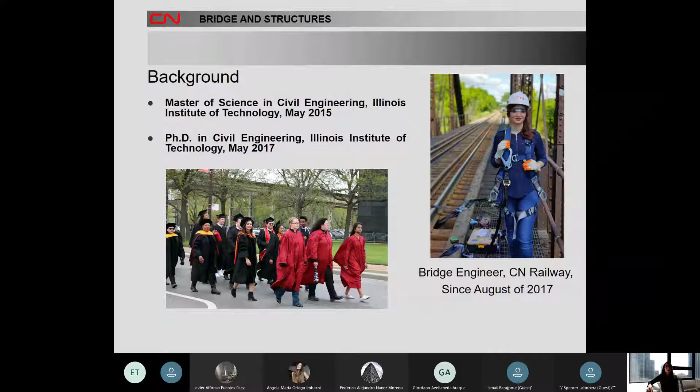CN is the Canadian National Railway Company. It has so many routes all around the US and Canada, so it's not working only in Canada—we have many routes in the US too. It has more than 20,000 miles of network spans in both Canada and Mid-America to the south. It serves Canada and the Midwestern and Southern United States. Importantly, the CN routes connect all three coasts: the Atlantic, the Pacific, and the Gulf of Mexico. As you see in this picture, these are the routes of CN, Canadian National Railway, going all the way from western Canada to the east, and from the north of the US to the south.

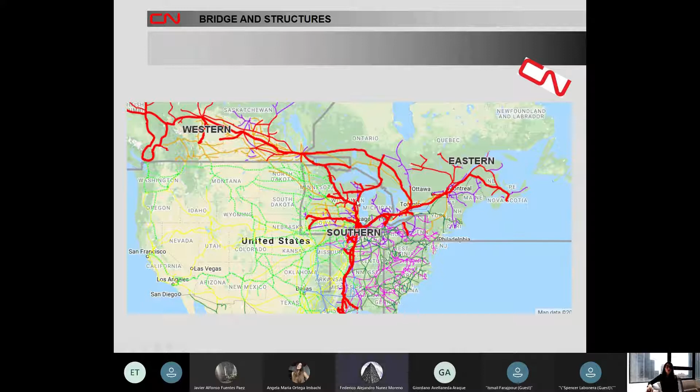CN has so many groups and organizations—it's a really large company. We are with the Bridge and Structures group, which is divided into four different groups: bridge rating, bridge quality, bridge testing, and bridge design. In bridge quality, inspectors go to the bridge to inspect it and identify corrosion or other issues, then give that information to the bridge rating group. Bridge testing does a similar thing in their own way—technicians go to the bridge, test it, and give the results to the bridge rating group. In the rating group, we analyze the bridge based on that data to see if any repair or strengthening is needed. If only strengthening is needed, the bridge rating group proposes it. But if repair of parts or replacement of spans is needed, it goes to the bridge design group, and our design engineers design those spans for us.

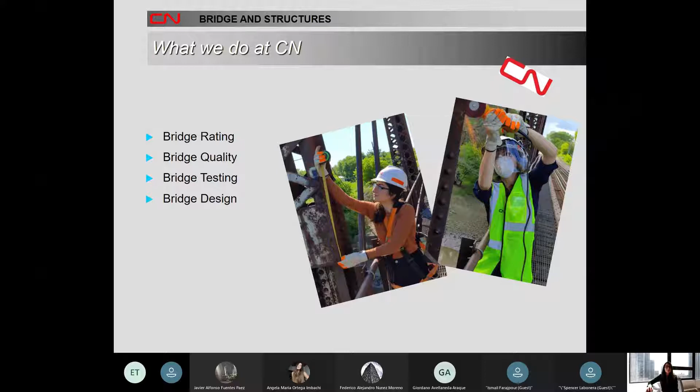The code we work with is AREMA, which stands for the American Railway Engineering and Maintenance-of-Way Association. AREMA comes in 4 volumes: Volume 1 is track, Volume 2 is structures, Volume 3 is infrastructure and passenger, and Volume 4 is system management. What we work with in the Bridge and Structures group is Volume 2, structures.

AASHTO is the code, the manual used for highway bridges. AREMA is the manual used for railway bridges. AASHTO is mandatory, however AREMA is not mandatory, and you can use it the way you want.

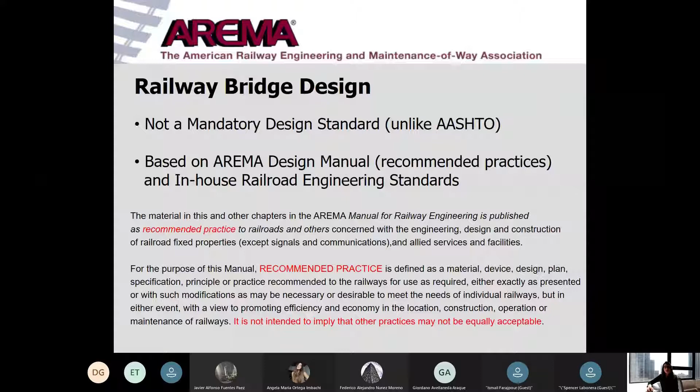So at CN railway, we use AREMA for our analysis, our design, our testing, and our inspection.

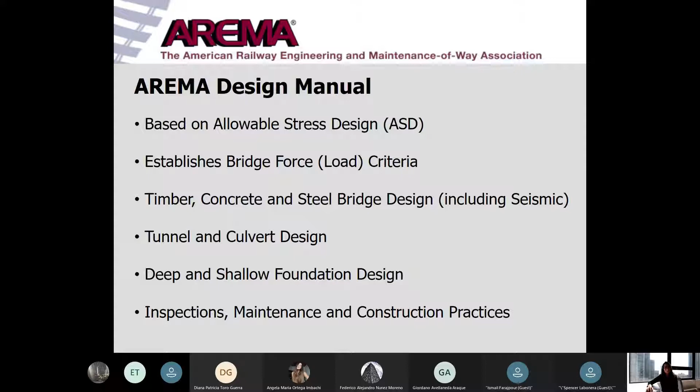There are different loads used in railway bridges: dead loads, live loads, and other loads. Dead loads are primarily the span's own weight. Also, any other static load expected to remain for the lifetime of the span is assumed as dead load.

Train or vehicular traffic are the live loads, temporary in nature and usually in motion. The standard design live load for railway bridges is the Cooper E load. Cooper E80 is what we use right now for design of our bridges, and Cooper E50 is what we use for our analysis. The way you convert E80 to E50 is simply by multiplying the load by 5/8.

There are also other loads like impact, traction and bracing, centrifugal, and wind. These are loads associated with the dynamic effect of the primary live loads or natural forces. The engineer analyzes the structure for a combination of loads and considers those which produce the maximum stresses. These loads, which may or may not be present at all times, are taken into account as they apply.

Other loads include the following. The first is the impact load. This dynamic load includes rocking and direct components that together can reach values as high as 60% of the primary live load. Short spans will be subject to higher impact loads than longer spans, due to a combination of track and wheel geometry and suspension parameters of the rolling stock. The condition of approaches will particularly affect the magnitude of the impact.

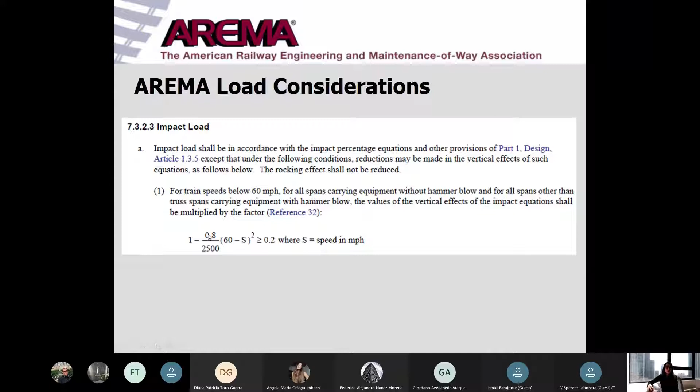This is also the code we have for centrifugal force and longitudinal force in AREMA. I explained the longitudinal, centrifugal, and all the other loads, so I'm just showing you how they are presented in the AREMA manual.

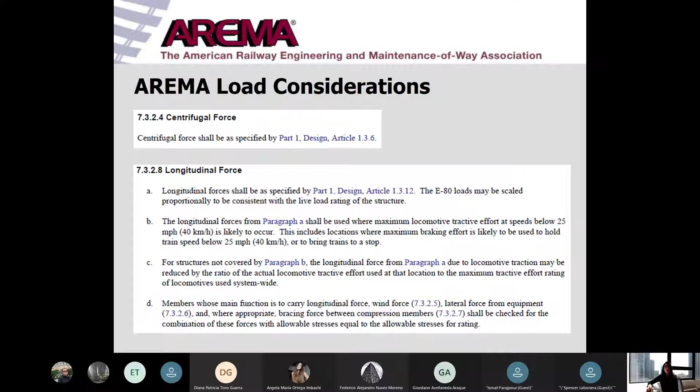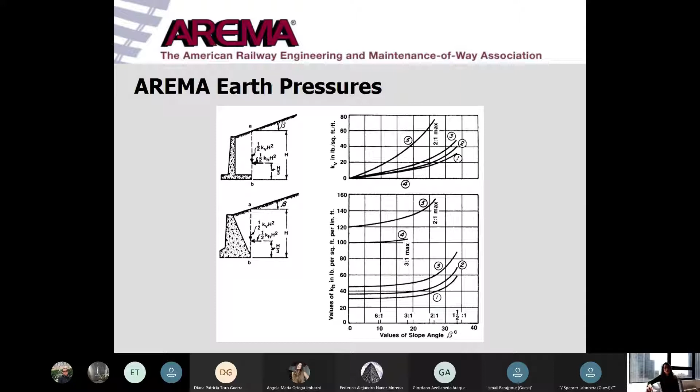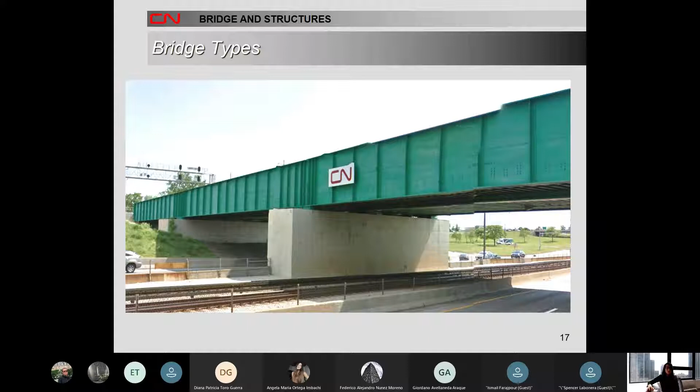We have different span types, different bridge types. I'm going to explain each of them for you.

This one to the right is DPG, which stands for deck plate girder. As you see in the figure, it consists of two plate girders, and the deck stands on the girder. So whenever the train wants to pass the bridge, it passes on top of the bridge.

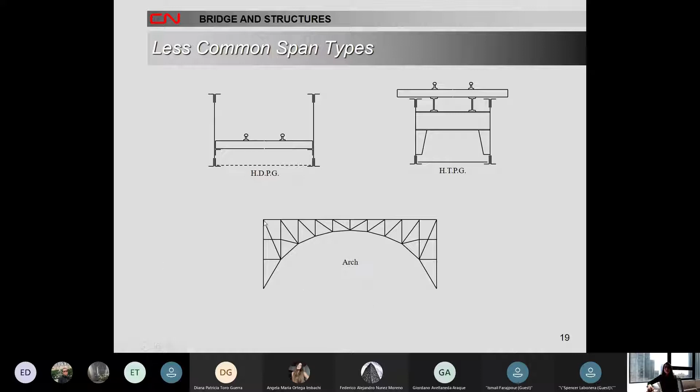We also have a couple more span types. Half DPG is simply the DPG where the train passes in between the two girders. And the half TPG is the TPG span where the train goes over the two girders. This is also an example of arch bridges at the bottom, you see that?

So we have discussed deck plate girder, through plate girder, through trusses, and deck trusses. Each component of the bridge, depending on the type of span, is designed to perform one or more specific functions. The functions of the structural components in these four common types of railway bridge spans will be presented on the next few slides.

Since bending moment is usually maximum near midspans, the role of these components are most important at that location. Rivet holes in the bottom flange near the midspans are vulnerable locations to fatigue crack initiations.

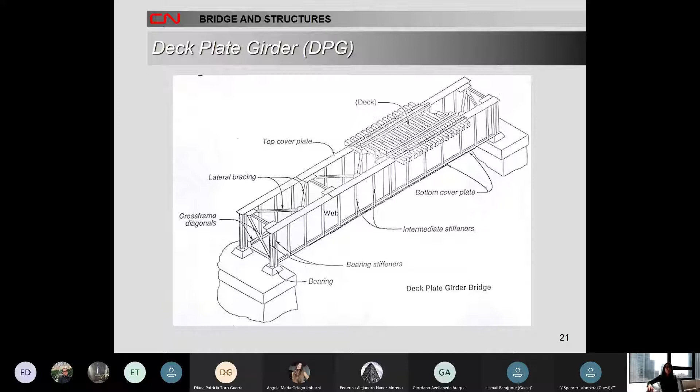This is an example of the deck plate girder. This is also another example, you see it from the top view. The primary member components of a deck plate girder span are top and bottom flanges, shelf angles, components, web side plates, and cover plates.

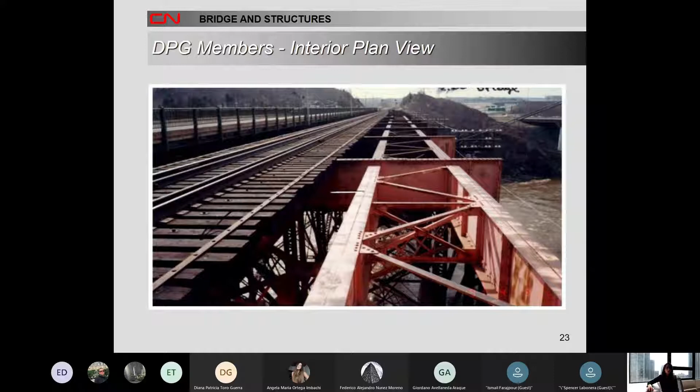These are the deck plate girder from the inside view. You see the bracings, you see the stiffeners here. This is the top flange, this is the bottom flange, and this is the web.

Same as what I said for DPG spans, the web takes the shear forces, and the middle part of the span is where the maximum bending is applied.

We have different bracings for TPG spans - lateral bracings, knee bracings, and traction bracings. Traction bracings are those that resist the longitudinal starting and braking forces from the trains.

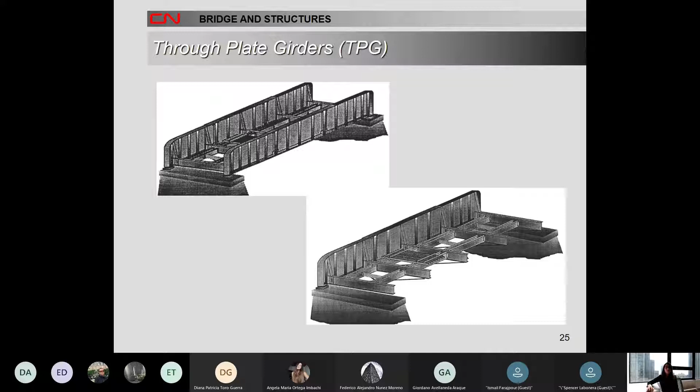I have shown this picture in a separate page so that you see the TPG span from a closer view. So as I said, first the loads from the train are applied on the ties, then it will go to the stringers directly, then it will be transferred to the floor beams, and then it will go to the girders, and from the girders it will go to the bearings and then the earth.

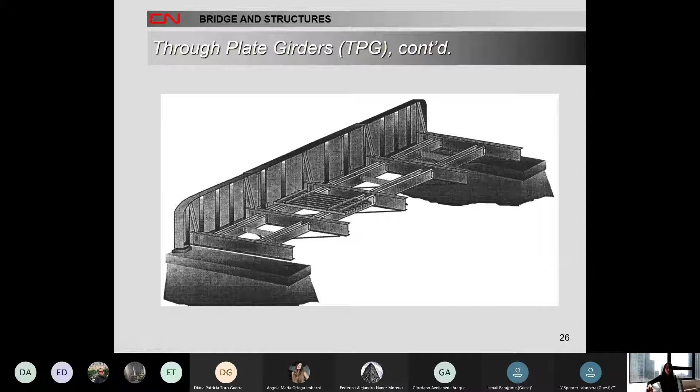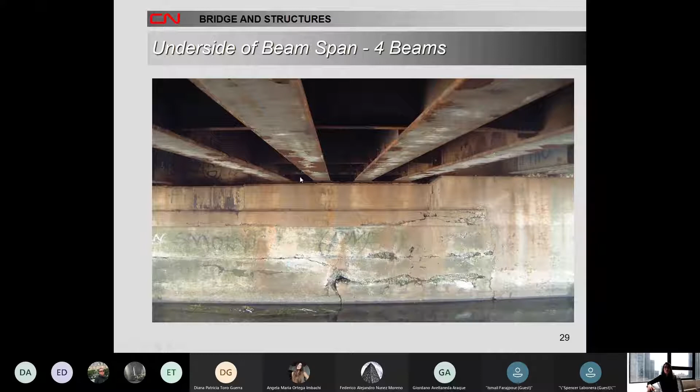This one is the underneath of the beam spans. As I said, the beam spans consist of so many beams right next to each other. They're shallower, and each of these beams takes some portion of the loads applied on the overall bridge.

This is another picture of the beam span. Similar to what I said for girders, the same thing happens to the beam spans.

Since bending moment is usually maximum near midspan, the role of these components is most important at the midspan location. By these components, I mean the top and bottom flanges. The web is more important at the support parts, because at the support we get the maximum shear.

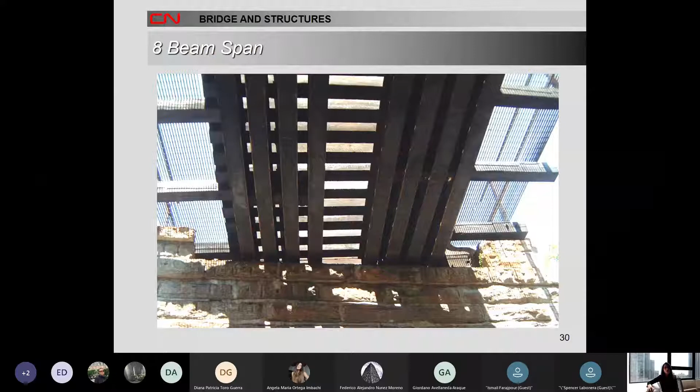This is also another picture from the underside of beam spans. I will go to the trusses next.

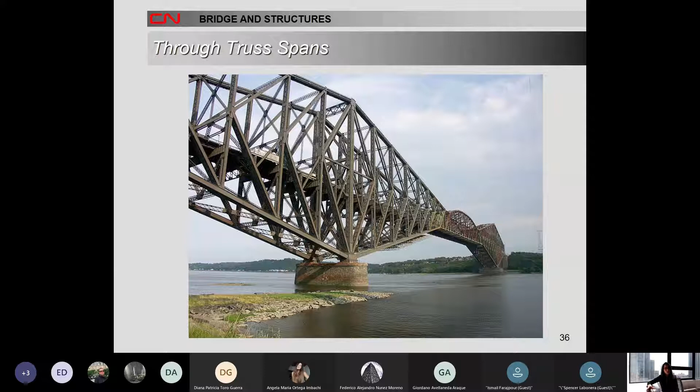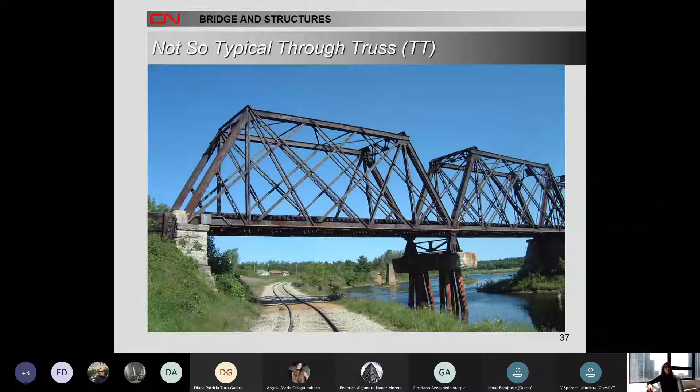This is another example of the through truss from the side view, and the top chord behaves the same as the top flange in the TPG. The bottom chord behaves the same as the bottom flange in the TPG.

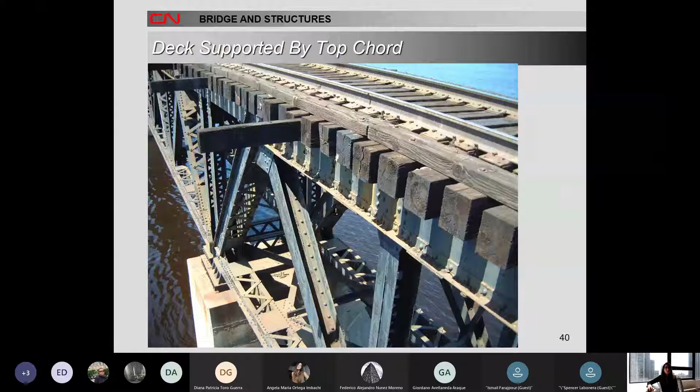This one shows it from the top view, the deck truss from the top view, and this picture shows the deck truss from the inside. As you see, we have bracings here, lateral bracing.

We have the vertical members, diagonal members here. These are also some of our bracings here, as you see.

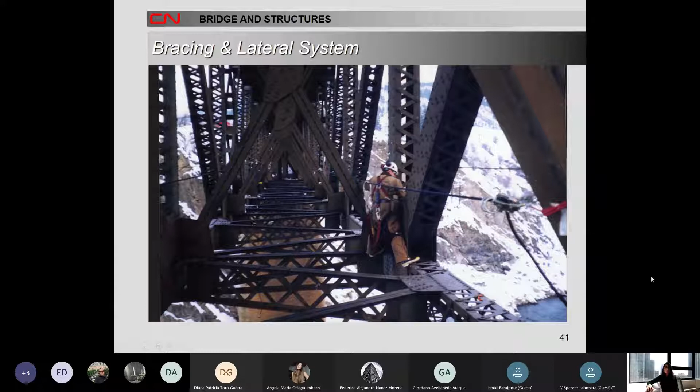As I said, the top chord in the truss is the same as the top flange in the girders. The bottom chord in the trusses is the same as the bottom flange in the girders. Vertical and diagonal members in the truss behave the same as the web in the girders.

Trusses are essentially analogous to deep efficient girders. They are used in place of girders for span lengths over 125 feet, because the material required to stiffen the deep web makes girders uneconomical.

In a truss, the top chords perform the role of resisting the bending moment, similar to the top flange in a girder. Similarly, the bottom chords of a truss perform the same function as the bottom flange of a girder. The function of the girder web, which is to resist vertical shear stresses, is similarly performed in a truss by the vertical and diagonal members.

This is the example of the steel arches. This is another example of steel arches. This one also shows it from the bottom view.

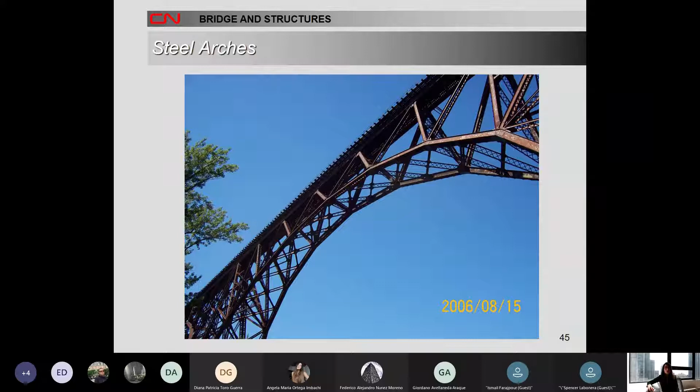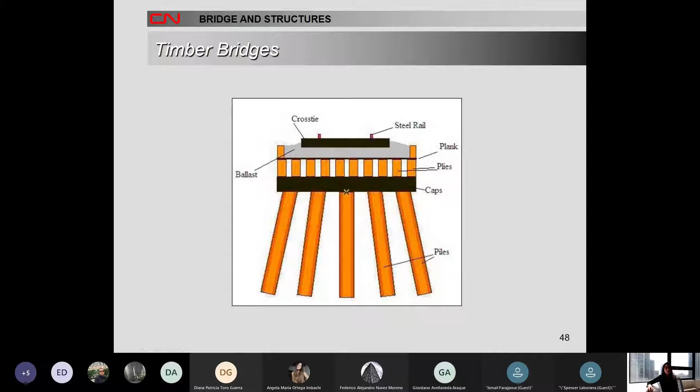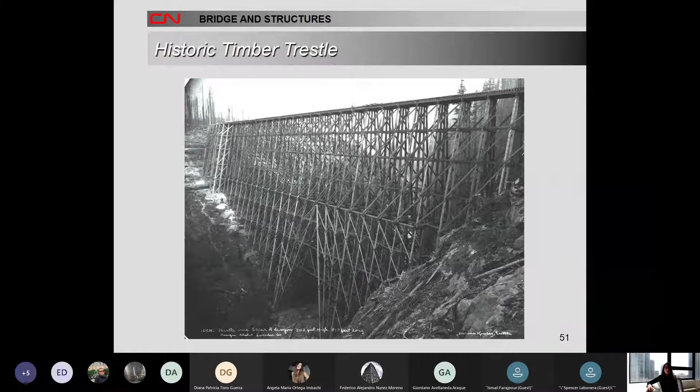Another type of span we have is the reinforced and pretension concrete span. Concrete permits casting in various shapes and sizes, providing the bridge designer with a variety of construction methods. Concrete members are used to carry axial as well as bending loads. Since concrete is weak in tension, members are reinforced with either mild steel or high strength steel to resist tensile stresses.

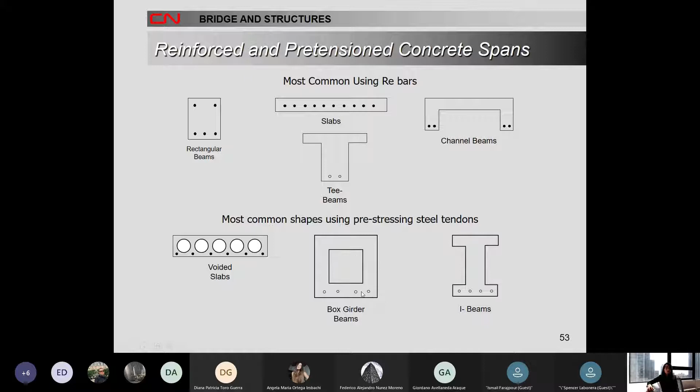In this figure you see different concrete cross sections. The left one is the rectangular beam, this is the slab type, this is the T-beam, channel beams - these are actually the most common shapes used in design and analysis. This one is the I-beam, box girder beam, and voided slabs.

This figure shows the concrete superstructure types. In the next slide, I'm showing you some examples of concrete.

It's good to know that sometimes delamination happens in concrete structures. Delamination occurs when a layer of concrete separates from the bridge deck or beams at or near the level of the outermost layer of reinforcing. A delaminated area gives off a hollow sound when struck with a hammer.

When the delaminated layer of concrete is removed from the member, the resulting hole is called a spall. In other words, a spall is a roughly circular or oval depression in the concrete. Spalls are formed by the separation and removal of portions of the surface concrete, revealing a fracture roughly parallel to the surface. Reinforcing steel is often exposed. A common shallow pothole is considered a spall.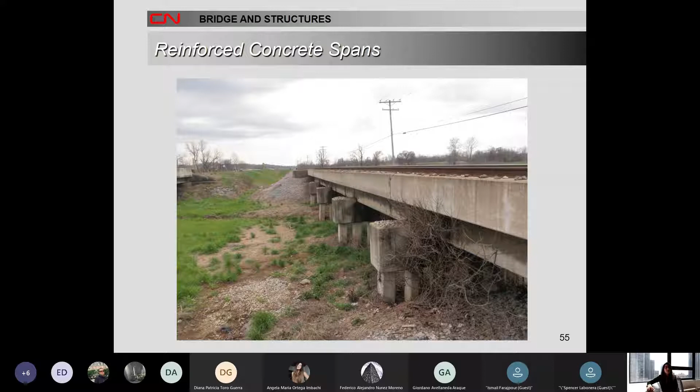In the next slide, you will see another example of the reinforced concrete span.

Some of the causes of concrete deterioration can be explained as temperature changes, which cause expansion and contraction. Freezing and thawing is another reason. Chemical attack, sulfate compounds in soil and water, moisture absorption, shrinkage forces, elongation of reinforcements, corrosion of reinforcements, foundation movements, overloading, impact or collisions, and so on. So these are what put the concrete spans in danger.

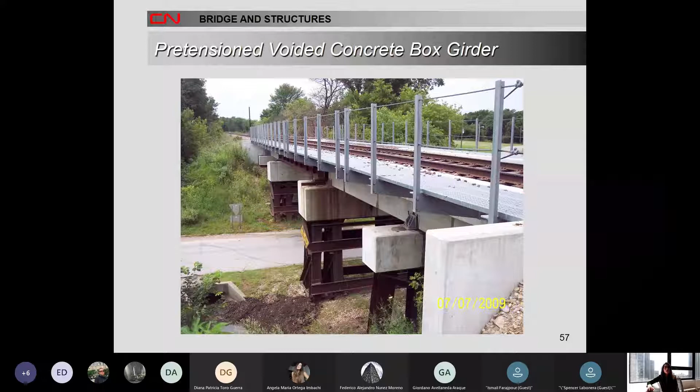In this slide you will see the pretension voided concrete box girders. This is also another example of the CN railway bridges. This one is actually the steel railway bridge that you see.

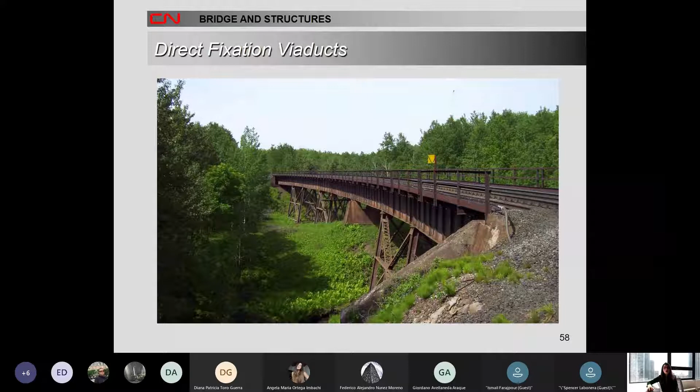I'm going to show you different spans that CN has right now. This is also another long span that we have at CN with long bents. So if the support of the bridges is made of steel, that's when we call them bents.

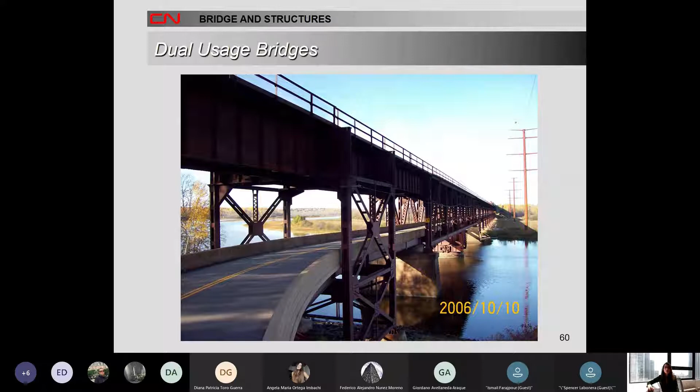This is another bridge that has two usages. The bottom part is the highway bridge, the top part is the railway bridge.

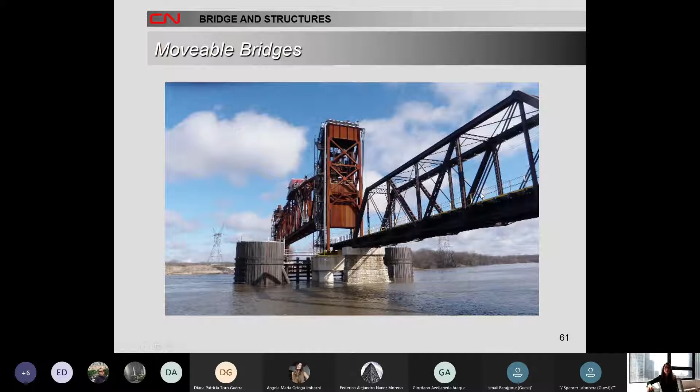This is an example of our movable bridges. As you see in this picture, whenever ships want to pass, this bridge goes up, and whenever the trains want to pass, this bridge goes down and the trains go over this bridge from here.

This is also the construction video. Let me show you the next one.

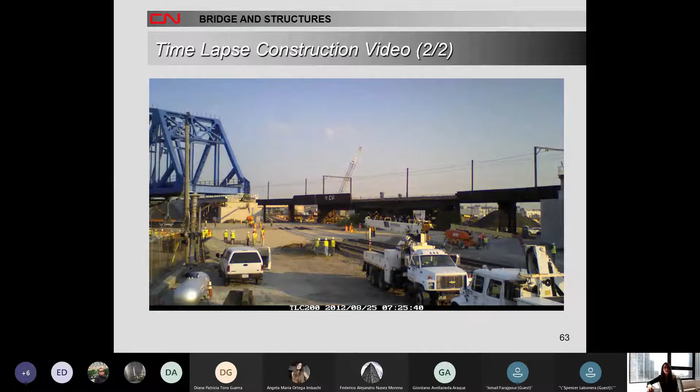As you see, they are now replacing the bridge. They're bringing the new span to be replaced. Here, this is the through truss span. And they are replacing this one with the old one.

And as I said, the through truss is the truss bridge where the train goes in the middle of the bridge. If it goes over the bridge, on top of the bridge, it's the deck truss. But once it goes in the middle, it is the through truss.

And as I also said, the top chords behave the same as the top flanges in TPG. The bottom chords behave as the bottom flanges in TPG. This is what is called the end post. And these are our diagonals, these are our vertical members. Having each of them is very significant in the bridge because each can handle a specific load that is applied on the bridge.

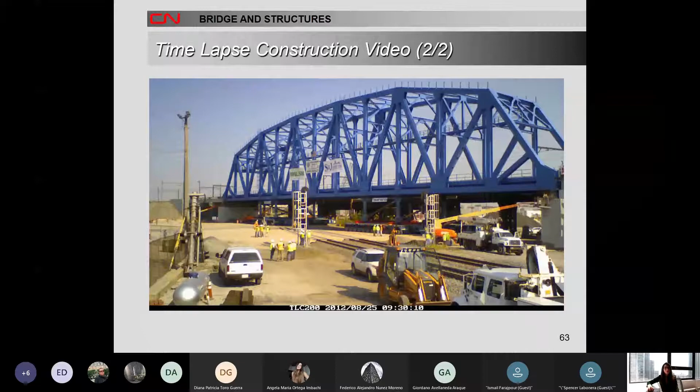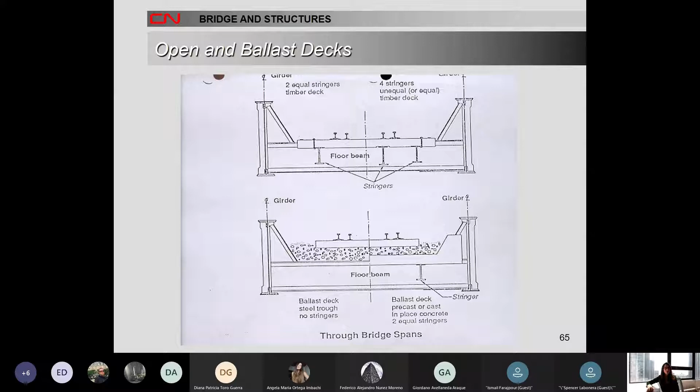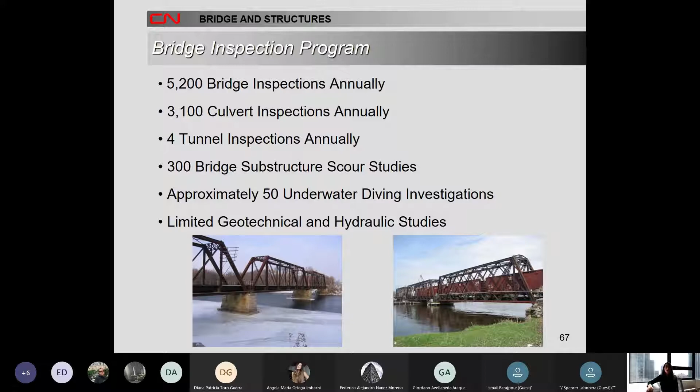For the bridge inspection program, that's actually what mostly the bridge quality group does at CN. Every year, 5,200 bridge inspections should be performed annually, 3,100 culvert inspections must be done. Four tunnel inspections, 300 bridge substructure scour studies, and approximately 50 underwater diving investigations should be done annually at CN.

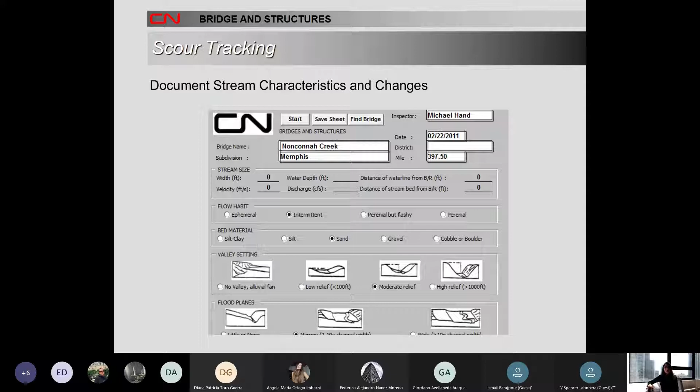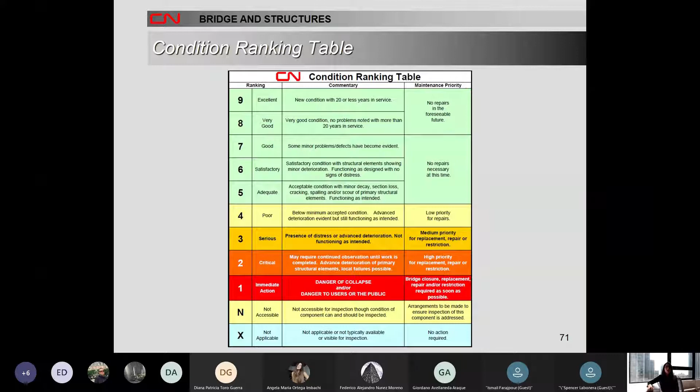Whenever the bridge inspector goes to the bridge, they have to use these numbers to show what kind of condition the bridge is in. As you see, this is the bridge inspection form. Once an inspector goes to the bridge, each inspector needs to fill this form for each of the bridges they are inspecting. Those ranking numbers I showed in previous slides are the ones used here.

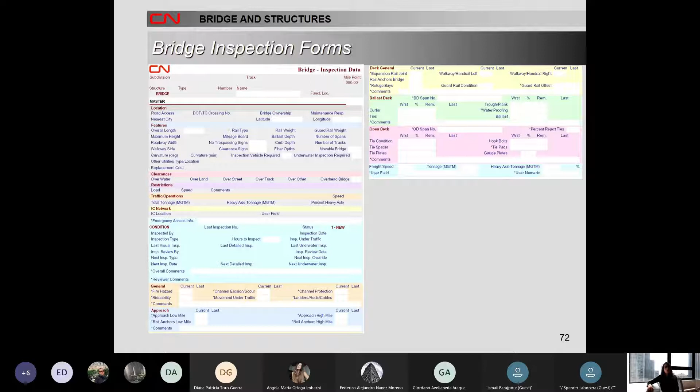Simply, when you put 1 here, it means the bridge is in a really bad condition; a worse condition means you have to do a very hard inspection and multiple analyses to make sure whether the bridge is safe or not.

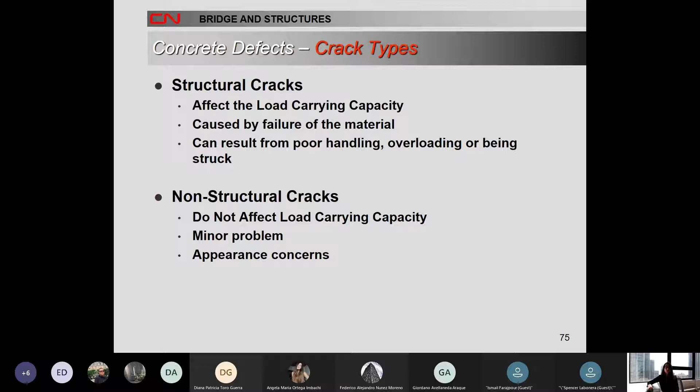For concrete cracks, we have two different types: structural and non-structural cracks. Structural cracks affect the load carrying capacity; they're caused by failure of the material and can result from poor handling, overloading, or being struck. Non-structural cracks do not affect load carrying capacity; they are minor problems with only appearance concerns. In this figure, if the crack happens in the middle, they are considered flexural cracks, and if they happen at the support, they are considered shear cracks.

A crack is a linear fracture in concrete. There are two basic types: structural and non-structural cracks. Structural cracks have the potential to be a serious problem because they can affect the structural capacity of the member. They're typically caused by dead load and live load forces, and can also be caused by stresses in members whose expansion or contraction is resisted, such as by frozen bearings or by forces due to the expansion of a slab or back wall.

There are two types of structural cracks. Flexural cracks, as seen in the top figure, start in the maximum tension zone or maximum moment region and proceed towards the compression zone. Shear cracks are the diagonal cracks that usually occur in the web of the member near the support.

For non-structural cracks, they are a minor problem themselves and do not affect the load carrying capacity of the member. They can, however, provide openings for water and contaminations, which can lead to serious problems. There are two types of non-structural cracks: temperature cracks and shrinkage cracks.

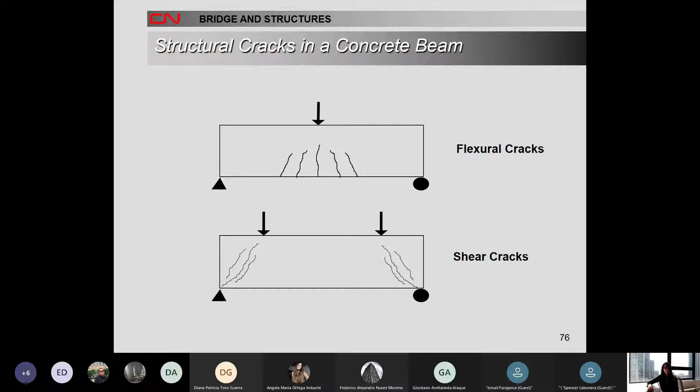Sorry, someone is talking. Are you asking questions? It's all right, don't worry, go ahead. Okay.

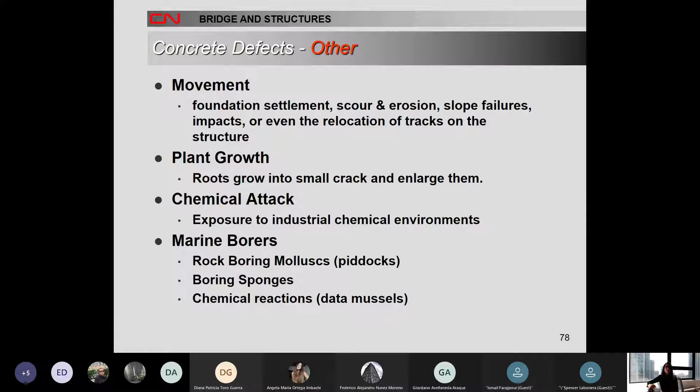Also, we can talk about concrete defects: movement, foundation settlement, scour and erosion, slope failure, impacts, or even the relocation of tracks on the structure, plant growth, chemical attack, marine borers. These are the concrete defects that can happen.

Also, we can talk about masonry defects, which have similar physical and mechanical properties as concrete. They are susceptible to many of the same kinds of deterioration. Their inspection is similar to concrete, and we look for deteriorated or missing stones or bricks.

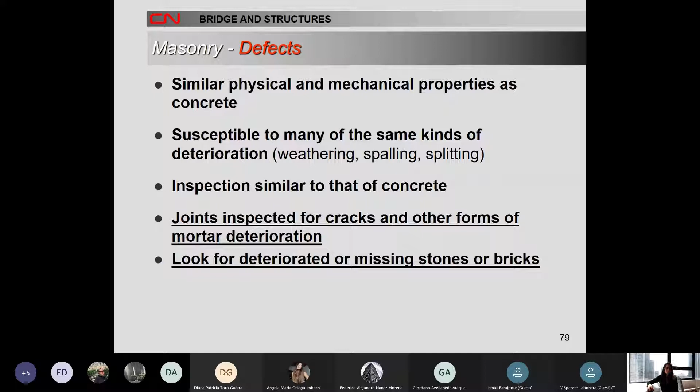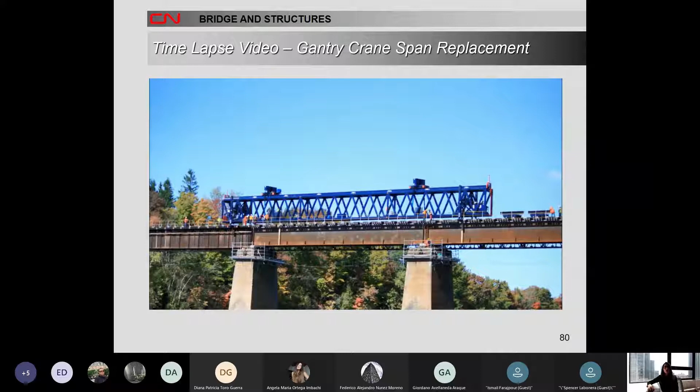This is also a video of a time lapse that shows you how to take one old, unapplicable span out and replace it with a new span. Basically, you have to block the whole bridge so no train goes over it, and that's usually really hard because that's how the company makes money, by moving trains. So whenever you replace the span, you need to do it as soon as possible, and all the work should be done simultaneously to avoid losing any time.

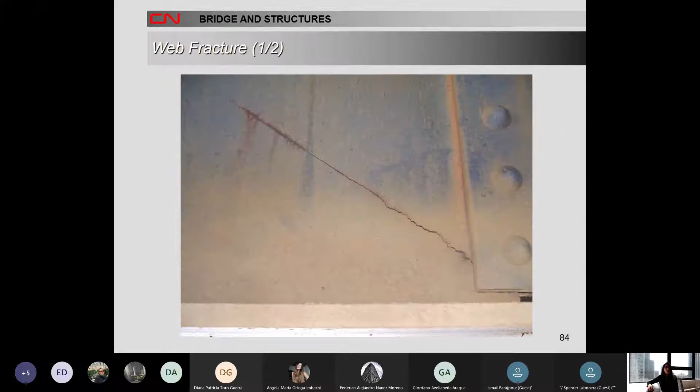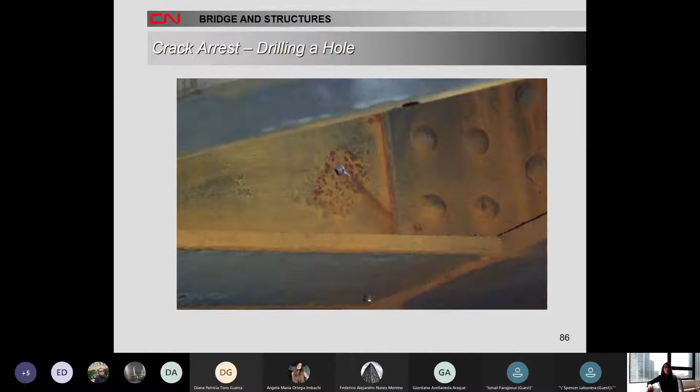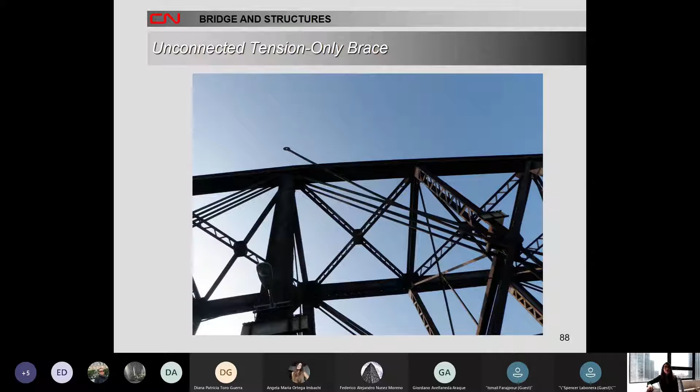This one shows the unconnected tension-only braces. This figure shows vehicular impact, as you see here. Crack propagation.

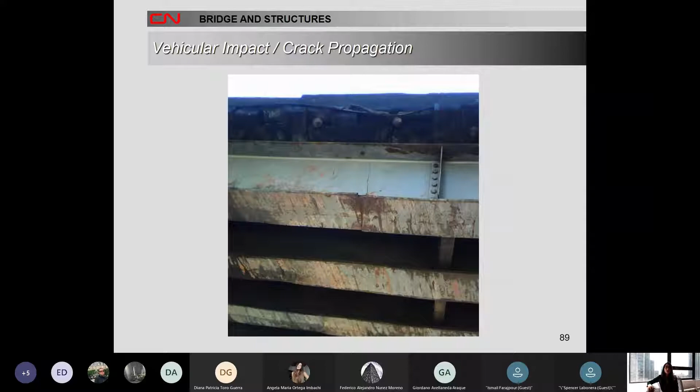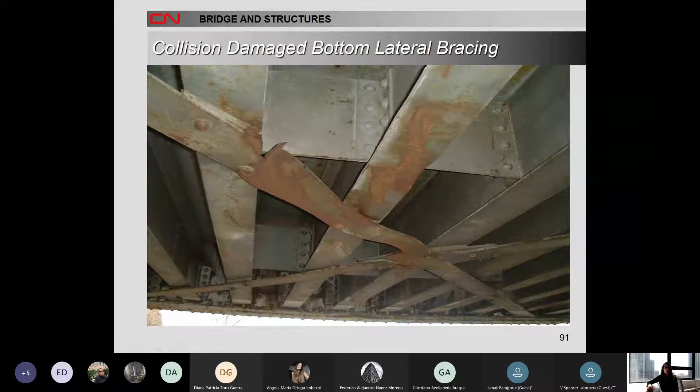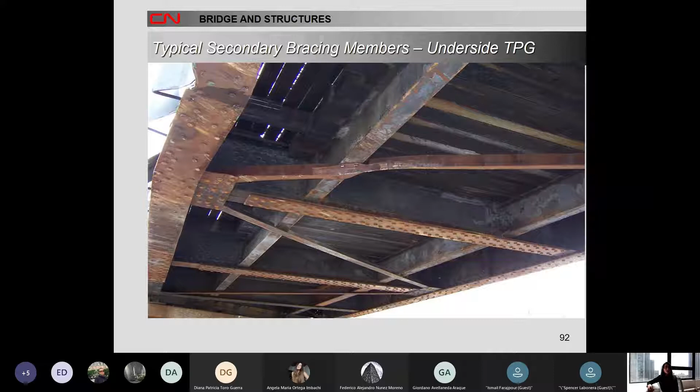In this figure, you will see the secondary bracing members. This one also, as you see, is damaged and needs to be replaced, repaired, or strengthened.

In this video, I'm showing the crash beams on low clearance bridges. When the bridge is low and different trucks are trying to pass under it, they attack the bridge and it gets damaged. So let's watch this video together.

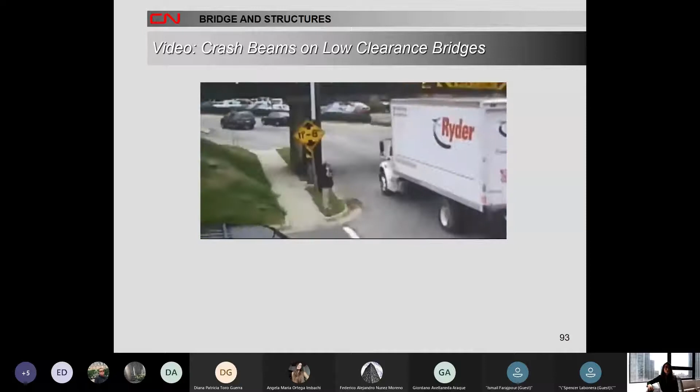It's really important to have a good estimation of the height of the bridge that we want to build, because once you build a bridge, it's really hard to take it out and make it higher.

This type of video that you saw happens many times. We have so many emergency situations where they call us and ask us to go to the office because there was a bridge hit by a truck or some other company, and mostly the insurance companies are also involved, because both the bridge and the truck are hit, and the insurance needs to cover for those damages.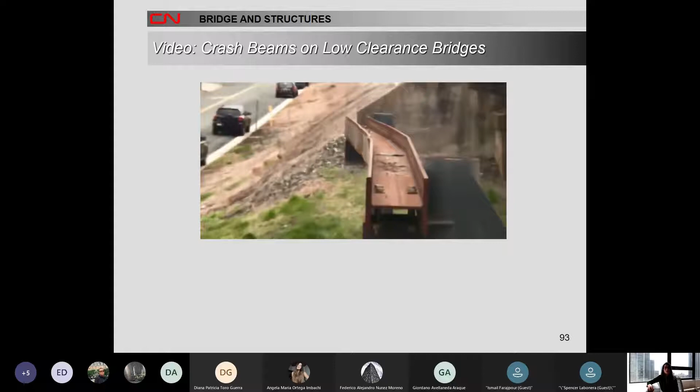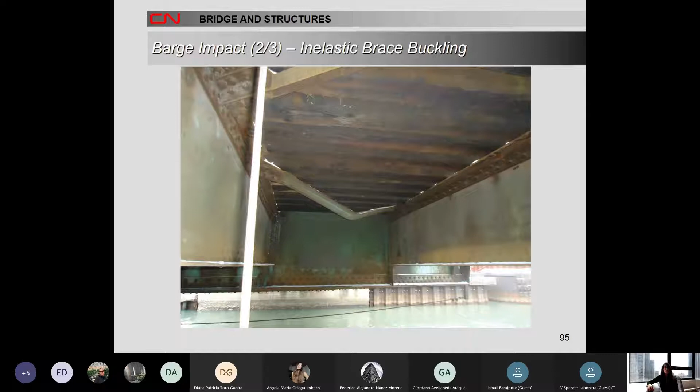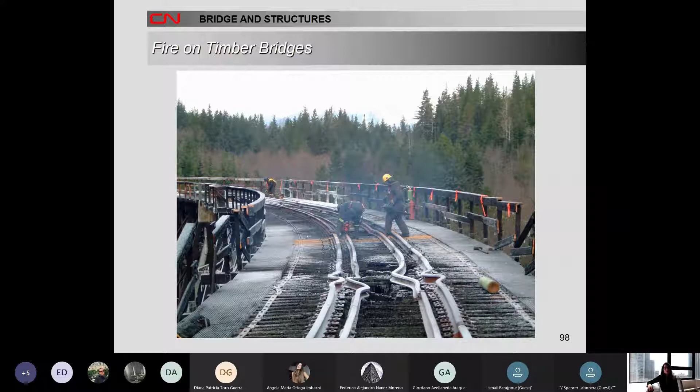This is another example of damage that can happen on the bridge, which is fire. This one is also fire. This type of fire mostly affects timber bridges because they are the ones most vulnerable to fires.

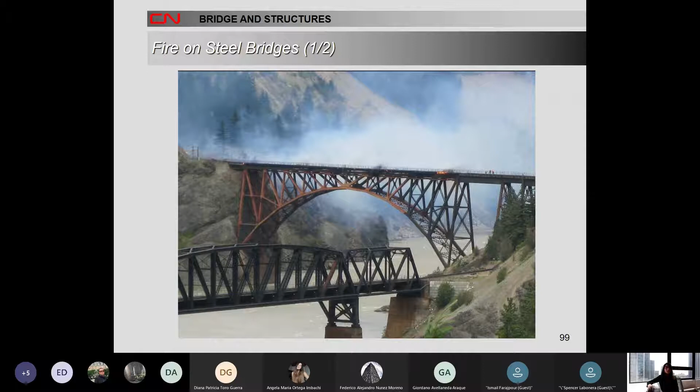This is fire on steel bridges. As you see, the ties, which are made of timber, are the ones heated the most, but the steel structures are also affected by fires. For sure, not as much as the timber bridges, but the steel structures can still be hit by fire. As you see in this picture, this is an example of fire on steel bridges, and you see how it has defected our steel members.

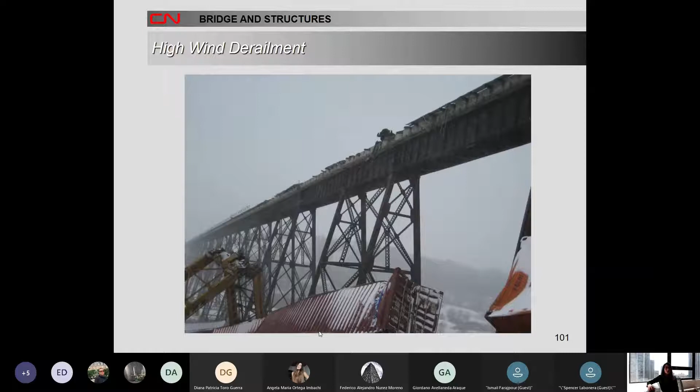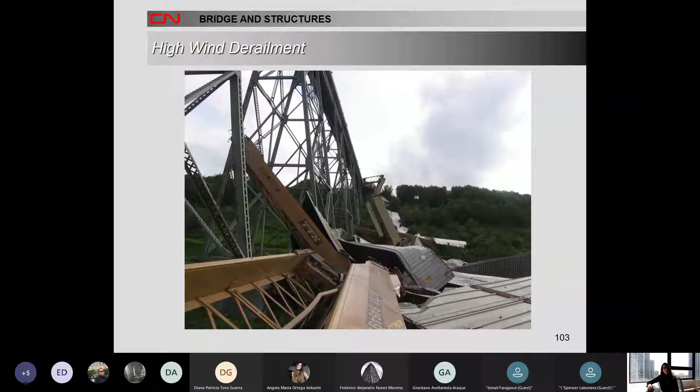This figure shows high wind derailments. When the wind came, you see that the train has fallen down from the track. So when the wind is so high, there is a possibility that the train falls down the bridge. This is also another picture of high wind derailment. This one also, you see how the bridge has been hit when the train has fallen over the track.

I'm showing you different examples of what might happen to different bridges and what we challenge daily at the company to be able to protect our bridges and give service to all around our branches in US and Canada perfectly.

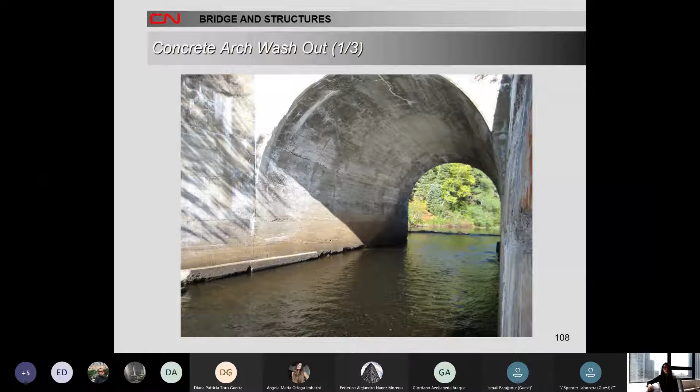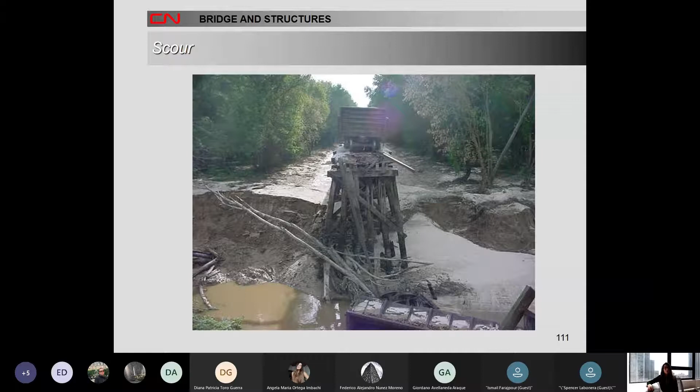So these were all the defects and damages that could have happened to bridges.

We must be careful about those, and have a plan for them, because once they happen, they put us in an emergency situation. There are so many trains scheduled to go over those bridges, and once something happens to that bridge, we have to stop those trains. The best thing we can do is find a solution to make that bridge effective and applicable again, so the train can go over it as soon as possible.

This was it for me. It was a fun presentation for me. It was nice to be with you guys, and I really appreciate the time you put into listening to this presentation. If you have any questions, I would be more than happy to answer those.

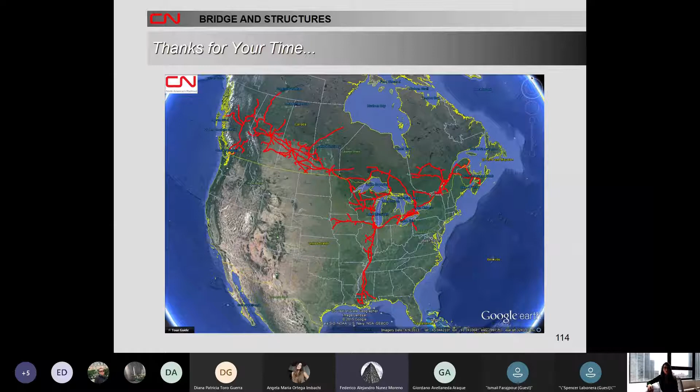Hi, very nice presentation, thank you very much. I have one question, maybe two. I want to know how much concrete bridges we can find in United States or Canada constructions versus steel bridges. And the second part of my question is how often you find damage on these two different kinds of bridges, concrete and steel, so you can maybe help me see which construction method is better for this kind of situation, like trains.

Thanks for the question, that's actually a very good question. We have so many steel and concrete bridges all around US and Canada, and it depends on the usage of that bridge. Usually for longer spans, we use steel bridges because it's easier to have longer spans in steel; the maintenance, the construction, everything is much easier. For shorter spans, we try to use concrete bridges. For both of them, depending on the situation, the weather, the temperature, and the condition where the bridge has been built, we face different challenges.